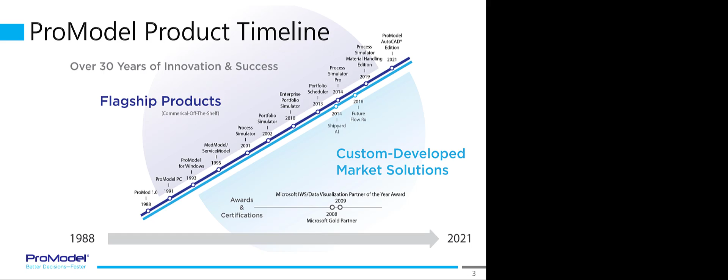Product overviews. ProModel continues to update and enhance our existing products while developing new products for special industries. In this section, I'll be covering our flagship language-based applications like ProModel and MedModel, our simulator-based applications like Process Simulator and Enterprise Portfolio Simulator, and then our special industry products including FutureFlow RX and BigBear.ai.

Our flagship product, ProModel, has been around in one form or another since 1988. This software development kit allows a modeler to develop very complex and customized solutions. The building blocks for developing a model in ProModel simulation include the locations, like workstations or machines, plus the entities, which represent the parts or the objects that flow through the system across the machines and workstations, and then arrivals of those entities into the system. That could be individual items or could be batches. And then the actual process flow, which consists of the operation instructions and the routings.

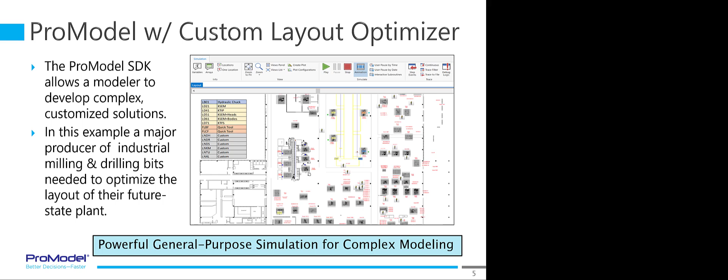In this case, we have a major producer of industrial milling and drilling bits that needed to optimize the layout of their future state plant. So we developed a model with all the routings for all the potential parts that would flow through the system. And as they flowed through the system, we kept track of the distance traveled from workstation to workstation. Then we used the extensive data output capabilities of ProModel to create an Excel-based layout optimization tool that minimizes the total part flow travel distance for any given mix and volume of products. The result was we were able to reduce by about 20% the total part move distance simply by moving the machines from one place to another on the layout.

So ProModel is a powerful general-purpose simulation tool for complex modeling. It allows the power user to design models quickly and easily, but also to interact with tools like Excel or other post-processing applications to create customized solutions.

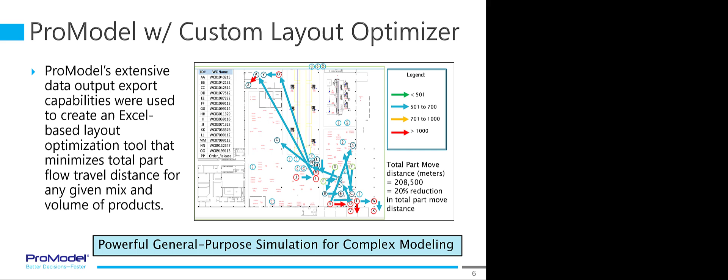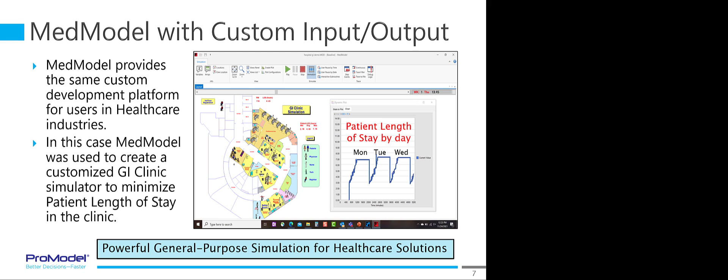The sister tool to ProModel is MedModel for the healthcare industry. MedModel provides the same custom development platform for users in the healthcare industry to create their own applications specific to healthcare. In the example to the right, MedModel was used to create a customized GI clinic simulator to minimize total patient length of stay in the clinic. The types of inputs that were fed into the model included everything from the types of staff, like physicians, nurses, technicians, etc., to specific equipment preferences by specific doctors, and also those doctors' schedules and the rooms that they were scheduled to use, and the accompanying nurses and technicians' schedules as well.

Several custom output tables and charts and graphs were created for this customized solution, but one of the most interesting was this type of chart here, showing specific times when each room was supposed to be in use, so the scheduled time for each room shown by the black skinny bar at the bottom, and then a detailed view of what actually took place during each procedure in each room. So you can see that we tracked things like setup time, time of the scope in until the scope was out, and cleanup time for the room and reprocessing of the equipment as well. This type of chart was created using ProModel's COM interface or the ActiveX capabilities to interact directly with Excel and thereby be able to see the inefficiencies in each room.

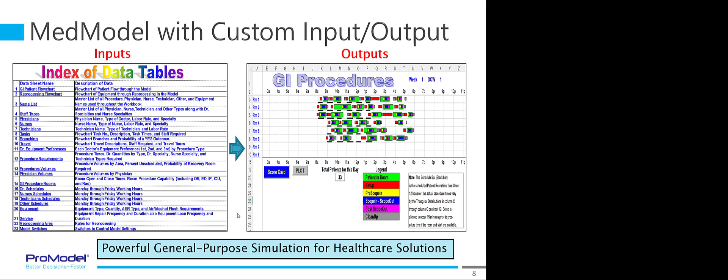So just like ProModel for manufacturing systems, MedModel is a powerful general purpose simulation tool for power users in the healthcare industries to be able to create custom applications. The next product is Process Simulator Professional. This tool is a powerful Visio-based simulator for those who are new or occasional users of simulation.

It has the same types of modeling elements as ProModel or MedModel, except instead of workstations or machines, we're looking at activities that entities flow through in order to perform the process. We also allow resources to be defined, and there are several built-in rules for things like batching or setting availability factors to represent times when activities and resources are unavailable.

The idea with Process Simulator is that it's very much fill in the blank. So as you can see here, there are fields here for capacity, for buffers, input buffers, output buffers, for processing times. You can even put processing times in for multiple entity types. So if you have multiple entity types, process time can be a function of the type of entity. And then we can also put resources onto shift calendars so that resources and activities are only available at certain times.

For those users who need to go beyond the fill-in-the-blank approach, Process Simulator provides much of the same simulation language as the ProModel and MedModel tools, but none of that is required to develop models. So in this case, you see here a complex operation where we need to perform several different captures of a resource. We capture the resource, we use another resource for a period of time, we free the resource, we capture a third resource, we use different teams of labor for periods of time, and then we free a final resource.

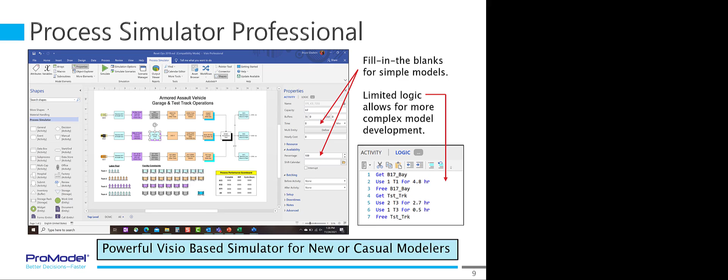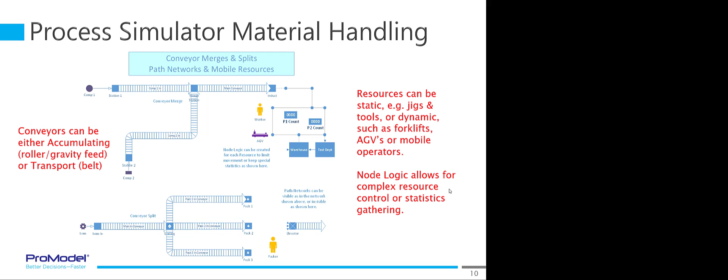In addition to the standard Process Simulator Professional version, there is a material handling version, which was released to allow a user to have conveyors and path networks that would define how a worker or a vehicle like, let's say, an AGV or a forklift would travel from one place to another. Conveyors can be either accumulating or they can be transport. So an accumulating conveyor would be like a roller or gravity feed belt, or a transport conveyor would be just like a solid belt, whereas if the first entity in line stops, then every entity behind it would have to stop. In this edition of the software, we even provide node logic, which allows you to define complex rules for controlling resources or for statistics gathering.

The next product is ProModel AutoCAD Edition. This is ProModel's newest product, which allows a user to build models directly in AutoCAD. It provides the same ProModel simulation language for model development and it allows for quick and easy export to Autodesk's Inventor product for 3D modeling. As you see here, many of the same elements are defined, such as locations, entities, conveyors, and process flows, and you can even create logic similar to in ProModel directly.

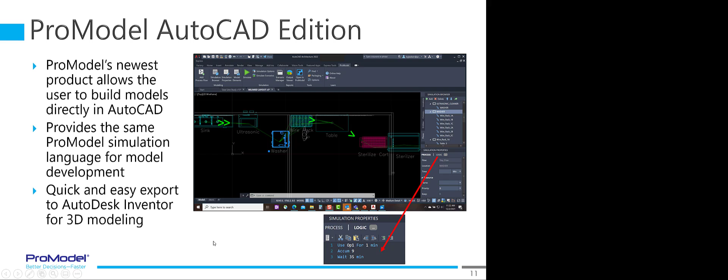Similar to Process Simulator are the many fill-in-the-blank dialogues that allow you to quickly and easily get a model up and running. Once your model is defined, just like in ProModel or MedModel or Process Simulator, you can create scenarios and you can view the outputs directly from AutoCAD. Once your model is completely developed, a simple click will create that model in Inventor and allow you to do 3D simulation. So it is important to note that in order to do the 3D simulation, you have to define 3D assets or blocks in AutoCAD to represent your locations, entities, and resources.

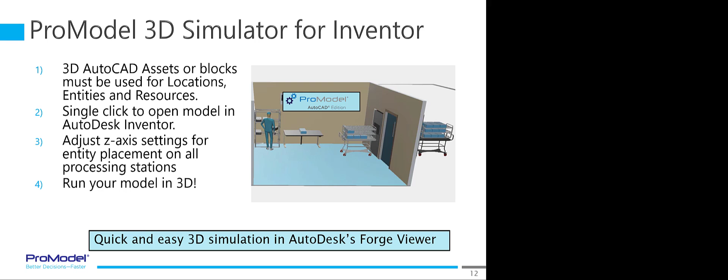The exciting news is that this 3D representation is much easier and actually faster to develop than our previous 3D simulator tool. So this uses the Autodesk Forge Viewer to actually run the animation, and as they continue to make updates to the Forge Viewer, those updates will simply become part of your experience in using the 3D version of simulation for Inventor. A very nice thing about ProModel, MedModel, Process Simulator, and the ProModel AutoCAD Edition is that they all use the same output viewer, which allows you to define the same types of charts, tables, graphs, and any customized statistics representations.

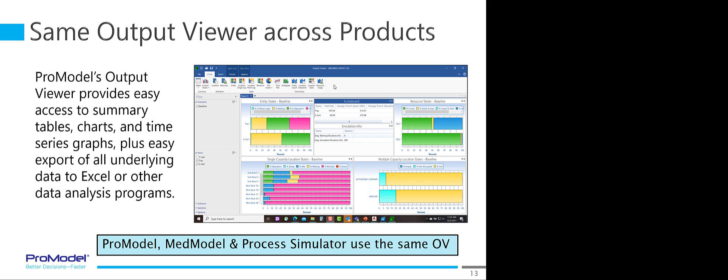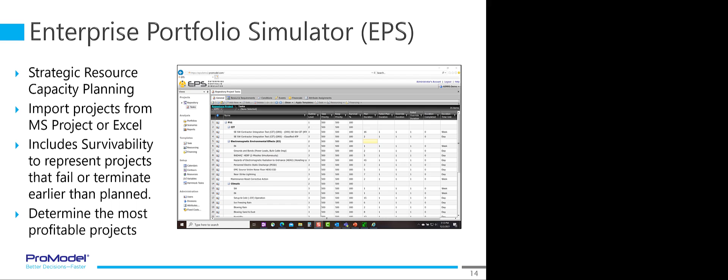The next product is our Enterprise Portfolio Simulator, or EPS. EPS is a strategic resource capacity planning tool that allows you to look at a portfolio of projects. So think of multiple Microsoft Project files that represent a number of projects, maybe Six Sigma projects going on in your business, for example, and maybe some of those projects will continue on, some of them will be discontinued, and when a project is discontinued, the resources involved in that project will be transferred to other projects. So EPS allows us to look at the survivability of projects that fail or that terminate earlier than planned and reassign those resources. And in so doing, we can determine the most profitable portfolio of projects.

EPS is completely fill in the blank. You fill in the information that represents your project, and you select the projects that you want in that portfolio, and you run your experiments, and you can then exchange certain projects for other projects and see which is the most profitable portfolio of projects.

The next product I'll talk about is one of our custom developed applications for the healthcare industry. This is called FutureFlow RX, and it is an operational and strategic planning tool for hospital systems, whether it's one hospital or multiple hospitals in a system. And it uses near real-time snapshots of current system state plus historical data to predict short-term metrics like bed capacity and staffing constraints. It can also be used for longer-term strategic modeling.

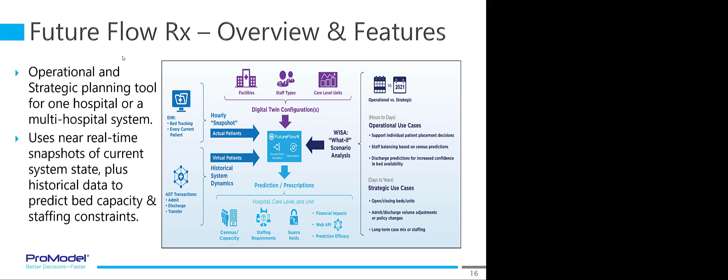And then that information goes into a discrete event MedModel engine, basically, and allows us to define what-if scenarios. The outputs are going to be things like expected census and capacity information, staffing requirements, and even financial aspects of patients being admitted or being transferred from one facility to another and how that affects the hospital system's financials. So FutureFlow RX is an exciting new application that allows hospital planners to do a better job understanding capacity needs and what's likely going to happen in their system based on the challenges of today, including COVID.

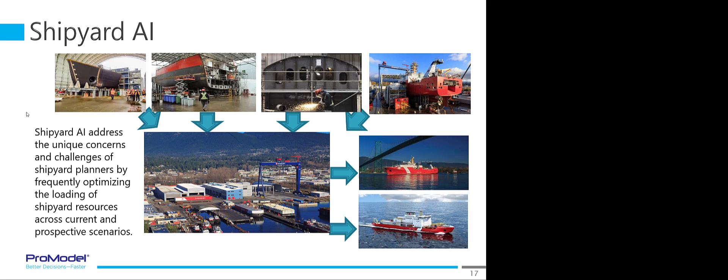The next customized application is called Shipyard AI, and that addresses the unique concerns and challenges of shipyard planners by frequently optimizing the loading of shipyard resources across current and prospective scenarios. As you can imagine, a shipyard is an incredibly complex project or sequence of projects that are going on, and the bringing together of many components, very large components, creates challenges in terms of space planning.

Shipyard AI allows us to look at the construction sequences of a ship, the constraints in those construction sequences, and the information that is existing in the company's ERP systems, and to bring that into a simulation engine, like a ProModel discrete event simulation engine, and consider all the constraints in that process in terms of space, labor, the facility constraints beyond laydown space, so things like number of processing stations you have there, and even heavy lifting resources like cranes on the site.

The tool then allows us to define the business rules that will control which units will go to which space and which ones have priority, and you'll be able to define scenarios that look at the likelihood of, let's say, different ships coming on as new projects. And the outputs are going to be things like your timelines of when the different components, the hull components, will reside in different areas of the facility. Also, the timeline of when the large lifting resources are required.

And then just an overall capacity chart showing how much capacity in a building or set of buildings is in use versus how much is available over time. And then finally, as changes are proposed in the scenarios, what is the likely impact upon the schedule? So Shipyard AI is a pre-configured model that provides these inputs and these outputs to planners in the shipyard industry so that they don't have to create their own models. We've done all the heavy lifting for them, and they can simply configure Shipyard AI to their current situation.

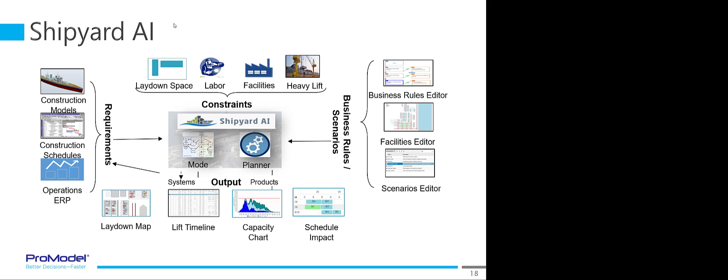For the academic world, ProModel continues to offer low-cost or no-cost software and materials to professors who wish to teach or perform research using ProModel simulation products. In fact, in January of 2022, we have a new version of our Simulation Using ProModel textbook with new chapters, both theory and lab, on design of simulation experiments. This is available from Cognella Publishing Incorporated.

So the road ahead for ProModel is basically to stay the course. We want to continue providing the best products, training, and consulting that's available in the industry, and provide products and materials for our professors who want to partner with us in teaching ProModel materials in the universities. In everything we do, we seek to help our customers make better decisions faster.